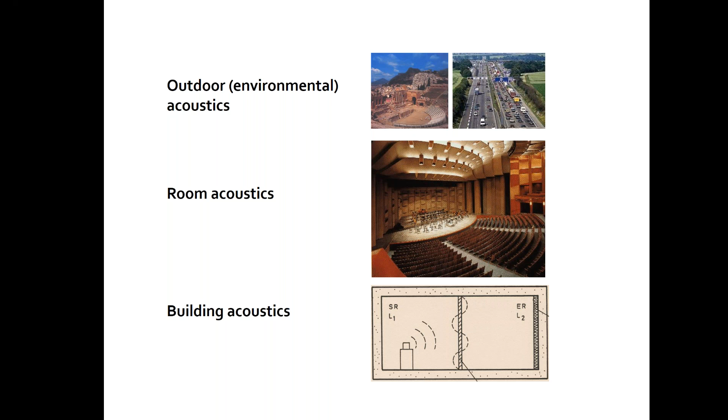Very important, of course, is also the so-called building acoustics that deals with the possibilities of noise propagation within built structures through airborne noise propagation or impact noise propagation, and the problems that occur when inhabitants of one unit of a building are disturbed in their living or working processes by noise originating from other parts of the building or from outside. So conventionally we put those issues under the heading of building acoustics.

So in order to have a basic grounding in discussions of building acoustics, it is important that we take care of a number of issues. One is, what are the main dimensions of the so-called acoustical space? Traditionally, we talk about acoustical space as a virtual multi-dimensional space in which the relevant parameters associated with sound events are captured.

As most of you know, these acoustical events have certain properties, such as the frequency, which is associated with the wavelength of the sound. They have some energetic capacity or intensity that is subjectively associated with the loudness. They evolve in the time dimension, so they have temporal patterns. And they also have complex combinations of multiple waves, in the musical sense, for example, in terms of harmonics, that give something like an acoustical correlate of what we in visual terms refer to as color. So those are the basic thrusts of how we describe an acoustical environment.

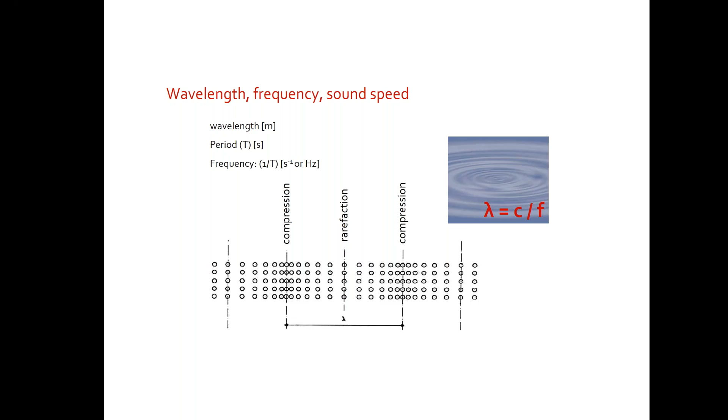The wavelength is very important in acoustical computations because the range of wavelengths, the dimensions that we encounter in room and building acoustics, are very significant in terms of the interactions of the wavefront and objects, be that obstructions in the sound propagation field or building elements that reflect and absorb sound. So that interaction is fairly complex. It is dependent on the wavelength and the frequency, and it also represents some of the challenge that we face in modeling of the environment.

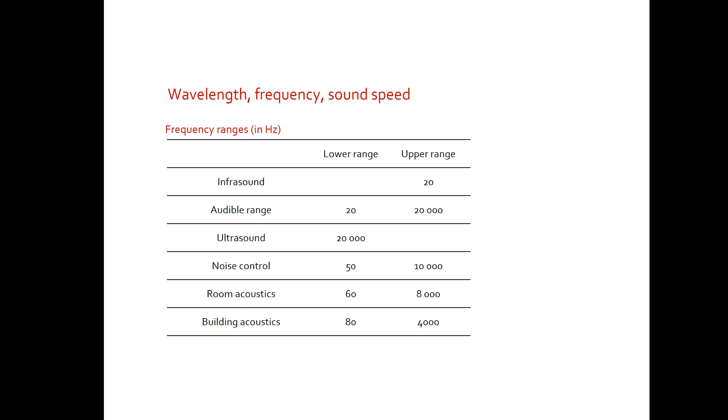As you are aware, as human beings we perceive a certain frequency range, from about 20 to, in the case of young and healthy people, 20,000 hertz. But for most acoustical applications, a subset of this frequency range is of interest. Noise control about 50 to 10,000, in room acoustics about 60 to 8,000, and in building acoustics roughly from 80 to 4,000 hertz is the range of acoustical events in terms of frequency that we take into consideration.

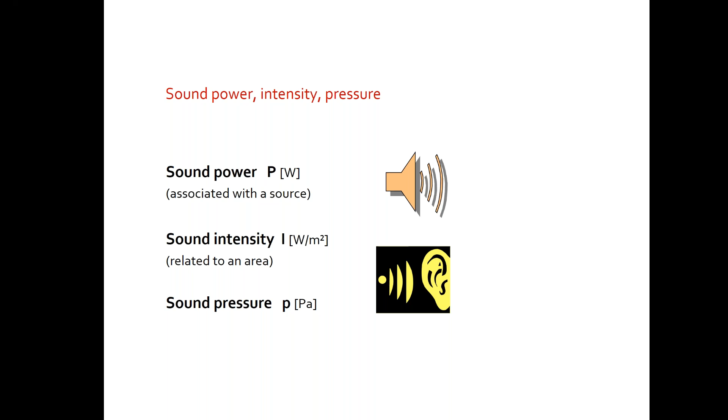The energy associated with sound events is typically captured in terms of sound power, if we talk about the capacity of the source to generate acoustical events. If we look at the energetic impact of a sound at a certain distance from the source, we can use the notion of intensity, which relates the sound power to a specific area. And for typical measurements, usually local fluctuations of the sound pressure, this amplitude, is measured and is referred to as sound pressure.

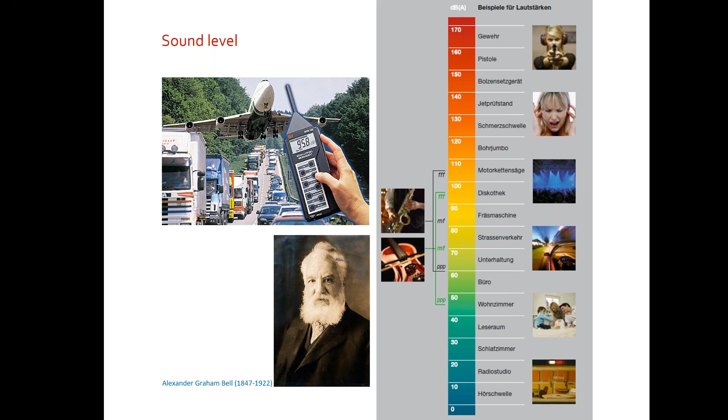And as most of you are aware, in acoustical specifications we typically do not use the classical units of power, intensity and pressure directly. In most cases, we use sound levels. So we represent the sound power, intensity, and pressure on a logarithmic scale. We take the measured values, make a reference to the threshold of hearing of people, derive from that this logarithmic scale, and express the intensity, sound pressure or sound power level in decibel units. These decibel units are easier to deal with in communications, and they provide a good overview of the energetic aspect of the acoustical exposure. The definition of that is fairly standard, and most of you are familiar with it.

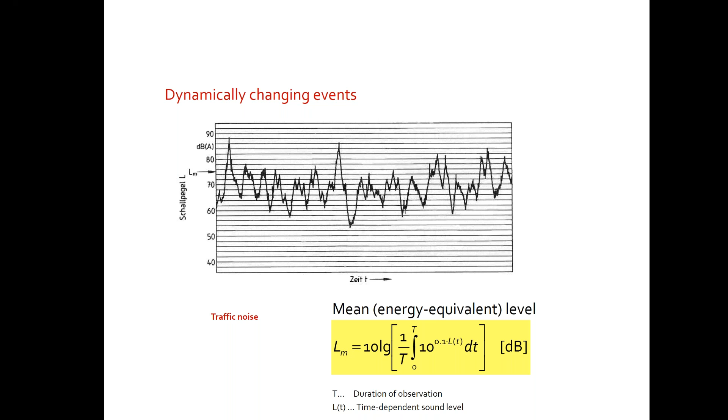Likewise, we can look at fluctuating events in the acoustical realm in terms of energy content over time, expressing the intensity of such events over time in numbers that provide an energetic equivalent of a fluctuating event, such as traffic noise. A very good way to obtain an overview of the basic properties of acoustical exposure is to look at the frequency domain. Basically, a frequency spectrum expresses the intensity of the event as a function of frequency. And you can have dynamic versions of the frequency spectrum and follow the evolvement of an acoustical event over time. It's a very good view to obtain an overview.

As far as our acoustical perception is concerned, it's a very complicated, very interesting, very dynamic feature, and surely we cannot cover it in a very short time. But generally speaking, our perception of the acoustical environment with regard to its physical fundamentals is quite nonlinear. We are more receptive to certain frequencies. That means lower levels of energy are sufficient to create an acoustical perception in the mid-frequency ranges.

For example, the language or most of the musical experiences are considered. Towards low frequency, our ear is, so to speak, less receptive and less sensitive. And this nonlinear property is usually depicted in literature in terms of the equal loudness curves.

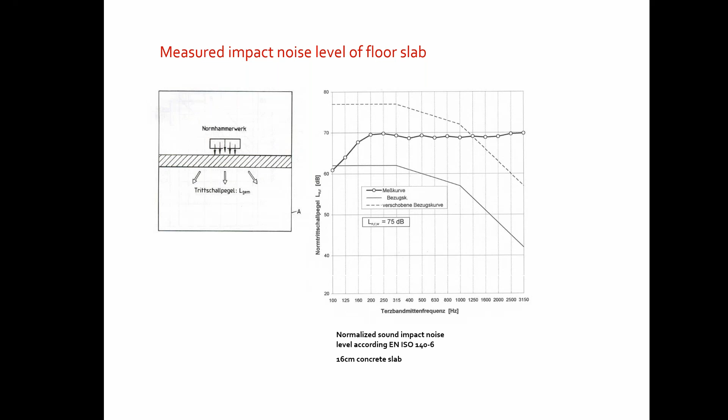With regard to the room acoustics, where we are talking about the acoustical quality of the indoor climate, which is very important for rooms that are meant for acoustical communication, like lecture rooms, classrooms, rooms for cinema, performances of music. For those type of rooms, this acoustical quality is important.

In order to capture the processes that are involved, we need to be aware about the impact of the form, the geometry, because that geometry determines a number of issues with regard to the sound propagation in the room, if it's uniform or not, if there are unwanted concentrations of the sound energy in specific spots in those rooms. But also we need to look at the properties of, for example, surfaces in the room, in view of how much and in which way they reflect, absorb, or transmit sound energy.

Incident sound energy typically can be reflected to a certain amount or absorbed, and that can have a direct effect on the resulting distribution and characteristics of the sound field in a room. So in room acoustics specifically, we look at a definition of the sound absorption coefficient as the fraction of non-reflected sound energy divided by the total incident sound energy on a building component, for example, or on a material.

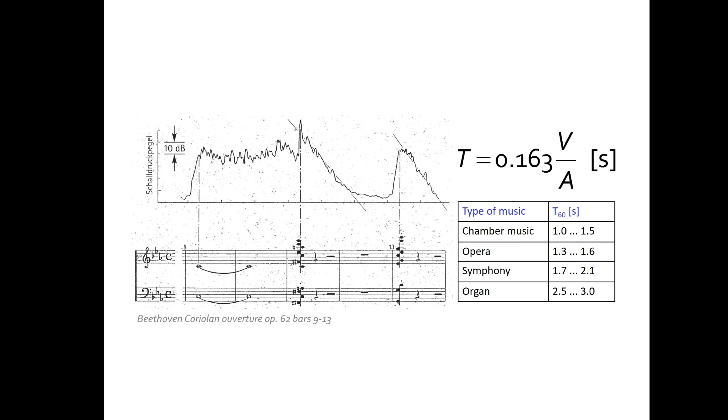But the reverberation time, as I said, is just one amongst the many different and useful performance indicators that have been introduced in room acoustics. In the IBPSA book chapter, there is a table and there are some definitions. I will not go through those definitions in detail, but today we look at multiple indicators to address various features of the expected performance with regard, for example, to clarity, to the intelligibility of the spoken word, and the warmth of, let's say, musical performances, and these different indicators that can be computed, can to a certain degree be predicted, help us define those issues.

Now, let's move to the part where we can maybe discuss some general approaches to how we can generate models of rooms and try to apply formalisms, mathematical formalisms, to analyze and predict the acoustical performance in various areas of environmental acoustics.

In the area of building acoustics, which I talked about before, there are a number of methods available to try, for example, to predict the rate of sound transfer, or the predicted transmission of sound from one portion of a building to another, by taking into account the properties of the involved construction elements, such as walls and floor constructions and so on. Some of those methods or algorithms are captured in standards. Different countries have different standards in that area, and the idea is to identify various transmission paths.

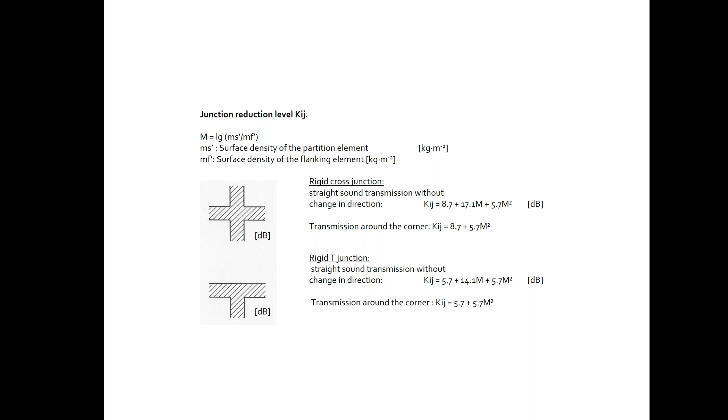Even though in principle there are numeric methods available to address those issues, because of the complexity and especially the frequency domain in building acoustics, they have not emerged yet as, so to speak, full-fledged numeric methods that you can pick up off the shelf. It seems to me right now those methods are usually used by researchers for rather limited models of, for example, a basic assembly rather than whole building simulations. So in that area, practitioners are mostly still using these types of gray box, empirically based models.

When we talk about sound propagation outdoors, and later on about sound propagation indoors, there are computational methods that are numeric and more detailed. We could argue that they evolved significantly and are also being used by practitioners. At a very basic level, you could also argue that the underlying physical phenomena are very similar when we talk about sound propagation in a free field and sound propagation in a room.

Basically, we can consider that the airborne sound emission can be captured in terms of a source emitting sound energy with some directionality pattern. It could obviously be fully uniform in an idealized sense, but it could also be directional. And then simply using the inverse square law, we could predict the decay of the local intensity as a function of the distance from the sound source.

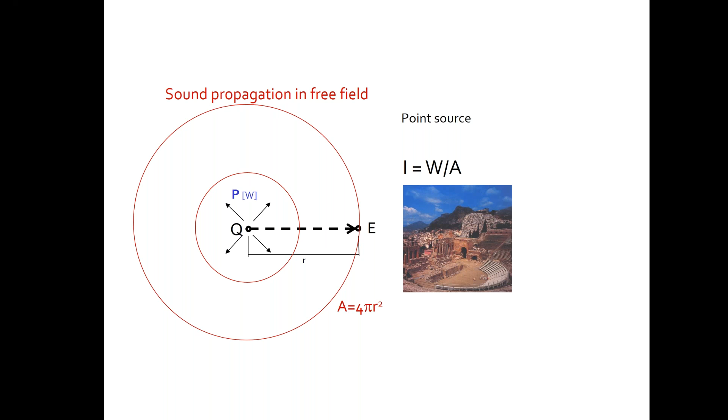There are, of course, some levels of complexity that affect those basic predictions. For example, we know that the temperature-dependent layering stratification of the air has an impact on this propagation. Likewise, we know that the concentration of water vapor in the air, the relative humidity, has an impact on the sound absorption properties of the air as a medium. So those complexities have to be included, especially for outdoor sound propagation, because they can play a major role.

We also obviously have to look not just at isotropic, uniformly sound-emitting sources, but also at different, more complicated or more involved sound sources, because the resulting sound distribution field would obviously be different. We also move into another layer of complexity if we consider that the relevant range of frequencies involved in environmental acoustics is fairly large.

If I simply compare that to light emissions, when you do light simulation, you obviously do have the notion of how to simulate different colors. But the methods that you would use, for example, ray tracing and radiosity, would not be so much affected in terms of the complex geometric interactions. In room acoustics, we have this issue that the interrelationship between the magnitude of the wavelength and the size of the buildings that, for example, act as obstructions or reflectors is fairly complicated.

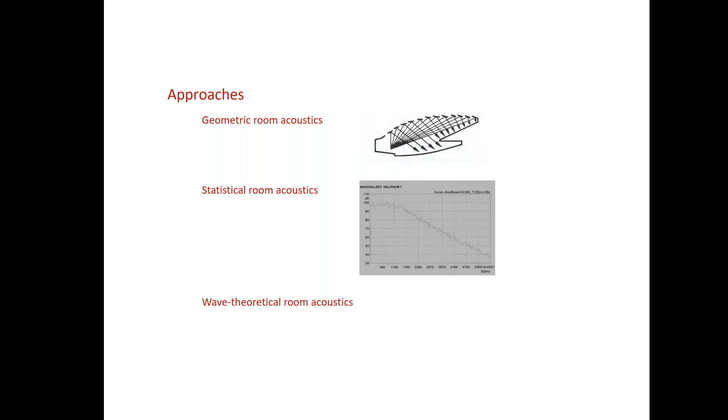the statistical room acoustics. The wave theoretical room acoustic is mathematically most demanding, and it would look at the impact of the wave nature of the sound field and resonance effects, and also the room resonance effects and three-dimensional effects associated with that, which for straightforward boundary conditions can be solved analytically, but involves a fairly complicated mathematical apparatus to address issues in room acoustics.

A relatively good way to obtain a picture of what happens in a room, in more simple terms, in comparison to the free field: you could imagine that in the free field, you are basically using the inverse square law, and you're saying that by increasing the distance from a sound source, the energy density is reduced proportional to the propagation of the wavefront. As the wavefront grows proportional to the square of the distance, the energy density reduces proportionally, something like 6 decibel every time you double the distance, and that would give you the basic tendency of the sound level

in the free field. Now, in a space, you have obviously the response of the room, and statistically speaking, that response of many reflections by many constitutive surfaces of the indoor space would create a diffuse field. And what you then expect at a specific location is the superposition of those. If you have a room which has very little absorption, so most of the surfaces are hard, then you get a diffuse field that is strong. If you have a room that involves a large magnitude of absorbing materials, then you get closer to what's going on outside, so you don't get a lot of response, and the diffuse field is weaker.

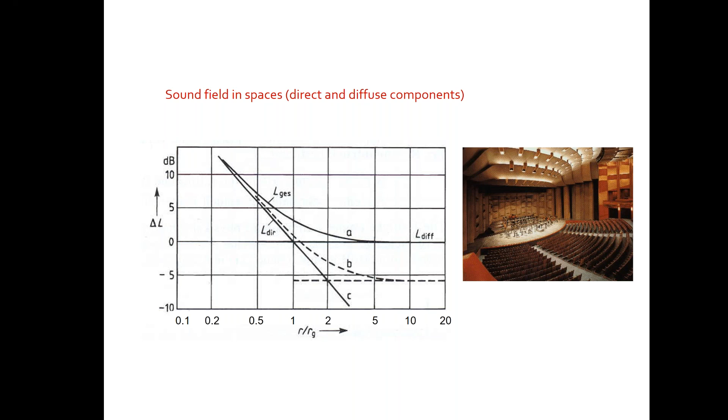So before we started to do computationally supported ray tracing, this notion of splitting these two and predicting them separately for standardized morphologies of rooms was quite common. In geometric room acoustics, as I mentioned before, we can constitute idealizations of sound energy being distributed in a certain direction, and pretty much as we do it in the area of visual simulation, we can then pursue the destiny of these rays.

If you're talking about, for example, specular reflection, we can apply the Snell law and say the angle of incidence and the angle of reflectance are equal. Once that's the case, you can create source images of multiple order, and that provides you with a convenient way to look at the distribution of the sound. So you can have first order image sources, or second order and multiple orders.

And in computational simulation, as long as you can assume that a surface is creating specular reflections, that is a smooth surface, and it is relatively large compared to the wavelength of the incident sound, then you can use the source image method in order to pursue the ray tracing and arrive at some information about what densities you expect at a certain point in time.

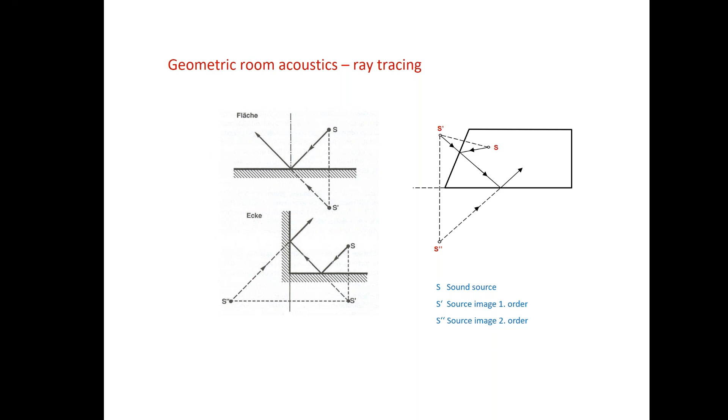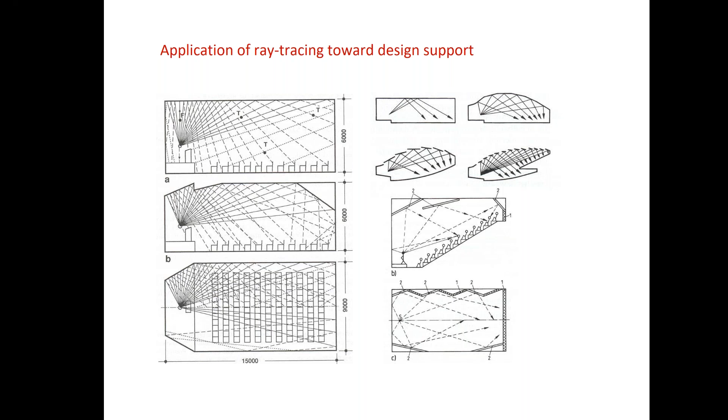It allows you to judge from the formal point of view also what is the impact of the shape of the room, the orientation, the slope of the surfaces, and in fact in design those can be used for special applications, for example large rooms for speech or musical performance, in order to optimize the formal aspects of the room, especially if it involves reflecting surfaces.

You can also take that possibility in the computational realization to judge, for example, if reflections are useful. Obviously, the indoor acoustics benefits from the fact that the enclosure of the room is providing reflections, because it intensifies and complements the direct sound component. That's, so to speak, the advantage of having acoustical events within rooms.

But if those reflections arrive too late at a specific point, then they might be problematic. They can create, in the extreme case, echo, but also, even if not so extreme, they can create a kind of messy, so to speak, and not very well-defined acoustical sensation.

So in order to do that for different applications, we allow for a certain maximum arrival time difference or path difference between the direct and the reflected sound arriving at a receiver, and a computational construction of those patterns of reflection allows us to see if, in fact, in a specific room, for a specific constellation of the source and receiver locations, we have to expect such problematic reflections. And if yes, how can we address that? By maybe adjusting the orientation of the reflecting surfaces, or if applicable, by using sound absorption to address the problem.

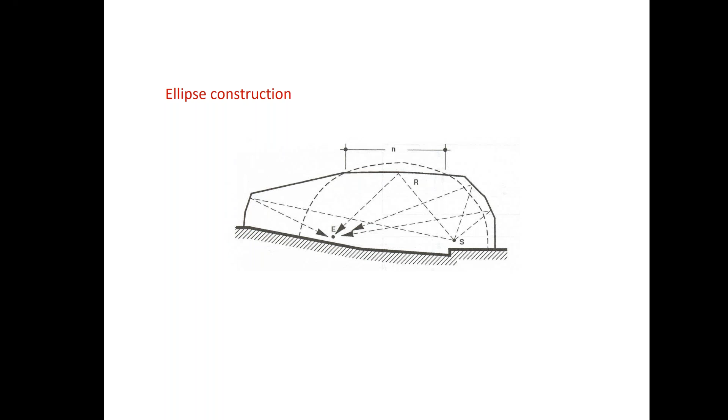Traditionally, we have used this method in order to identify what part of a room enclosure for a given constellation of source and receiver provides useful reflections, and what part of the room might provide reflections that come too late and create effects that we would like to avoid.

As I mentioned before, we need also to address this complexity, which is the interrelationship of the wavelength and the nature of the reflecting surfaces, because the wavelength of sound in room acoustics can be very different. At very low frequency, you have multiple meters, basically wavelengths that are the order of magnitude of the room dimensions. And if you go to high frequency, we're just talking about a few centimeters.

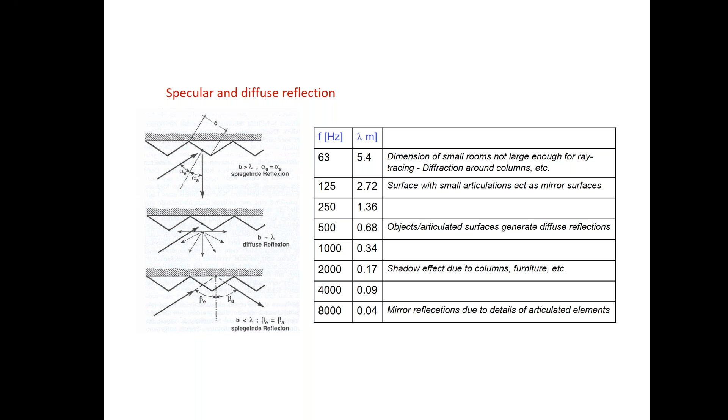So you can have articulations in rooms that are big enough for very short wavelengths to create mirror reflections. But if we get to a point where the dimensions of these articulations are about the same order of magnitude as the wavelength of the incident sound, then we get diffuse reflections. So we need to address those interactions also in the simulations, otherwise we will not be able to simulate the effect of scattering of the sound by rough surfaces, or for example, the presence of objects, columns, and those type of furniture elements in the way that they influence the sound distribution in a room.

To address those, there are different possibilities. Most of you are familiar with the visual performance simulations. You know that ray tracing obviously is used massively in those, but also radiosity, radiosity dealing mostly with, so to speak, the non-specular reflections. There are instances of both of these methods also being used in room acoustics. However, quite popular in most recent developments is that one addresses the specular reflections through the source image method, for a few orders, if you want.

But in order to address the scattering properties of rough surfaces, or where the wavelength and the dimension of the reflectors are problematic, in those cases probabilistic methods are also used. So the idea is that the energy being reflected after the sound bounces from the surface can probabilistically be diverted from what is suggested by specular reflection or Snell's law. And if you then do Monte Carlo type simulations, you could have a pattern that would be statistically representative of the behavior of that surface in dealing with the specific wavelength which is incident on the surface.

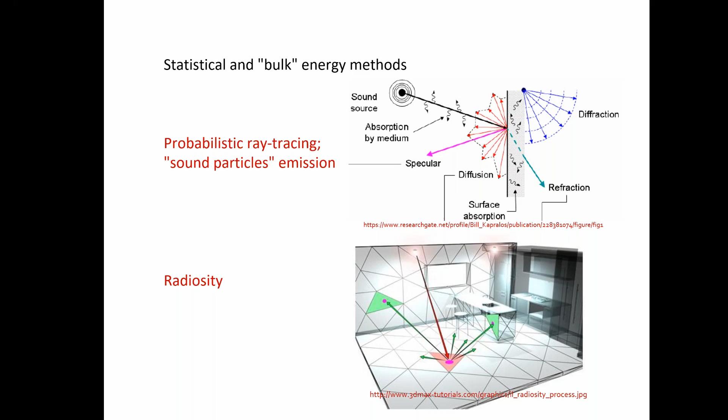So this is the method that most recent developments in acoustical simulations are deploying. I don't want to talk about specific programs. There are multiple programs that are available. Since we have been using one of these programs, I just mention it: the Odeon program.

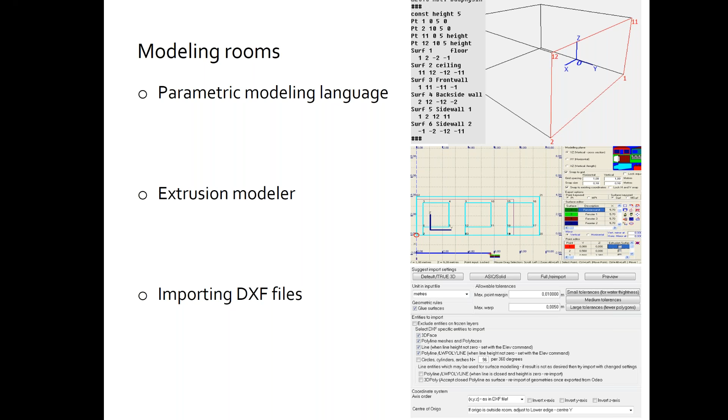The structure of these programs in terms of the input and output typically goes through a certain number of steps that I just quickly mentioned. You will start by defining the geometry of the room, either by some parametric modeling language, or you have some aiding tools that help you extrude a geometry, or you basically import from CAD files, BIM, DXF files, and adjust them in order to have a geometric representation.

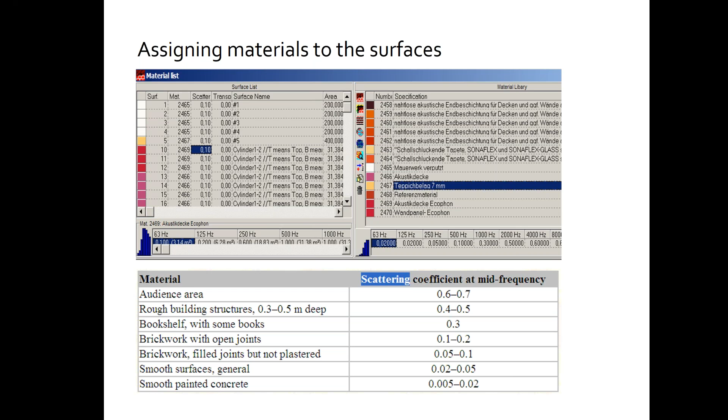Obviously, it's very important to assign materials to the surfaces that you imported in your model. That information involves the acoustical absorption coefficient, also the scattering coefficient. Most programs come with a basic database of some default materials that you can use in a specific planning task. You obviously need more applicable information from the manufacturer in case you're looking at specific products.

You need to obviously insert sound sources. These sound sources, again, can be provided by these applications in a default sense: human voice or a specific musical instrument. You can also generate sound sources by defining the three-dimensional sound distribution pattern and also the overall sound power, and that way define your own sources.

Then you set certain calculation parameters. This is the part where some experience, both in the foundation of room acoustics, but also with the applications that you happen to be using, is necessary: transition orders, how many early reflections are you considering through the source image method, and when you go beyond that, what do you do in terms of the number of rays and things like that.

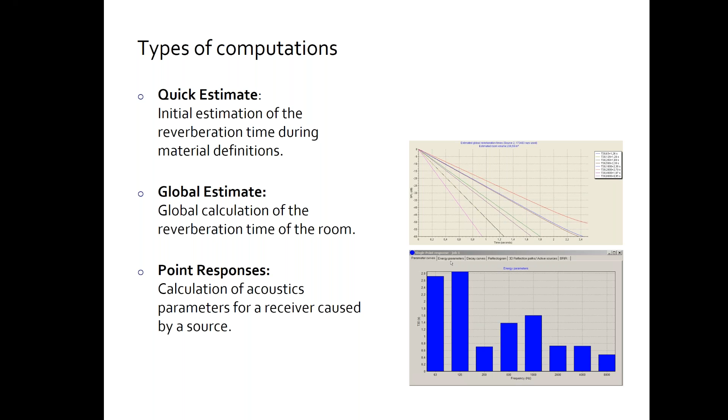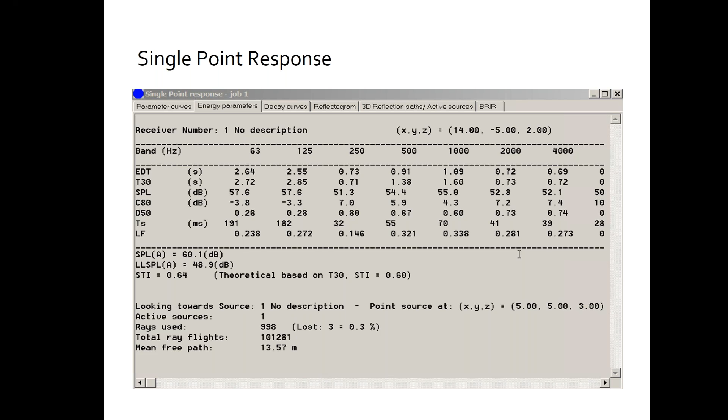These programs provide you the possibility to do a very quick estimate, for example, using the Sabine method. You can make some global estimates for the room as a whole, so get room-related mean values of indicators such as the reverberation time. But also, for the specific receiver points that you have defined individually or on a grid, you can calculate in detail the value of multiple performance indicators, such as the early decay time, the reverberation time, sound pressure levels, measures of clarity, and the speech transmission index, and so on. So they give you these values.

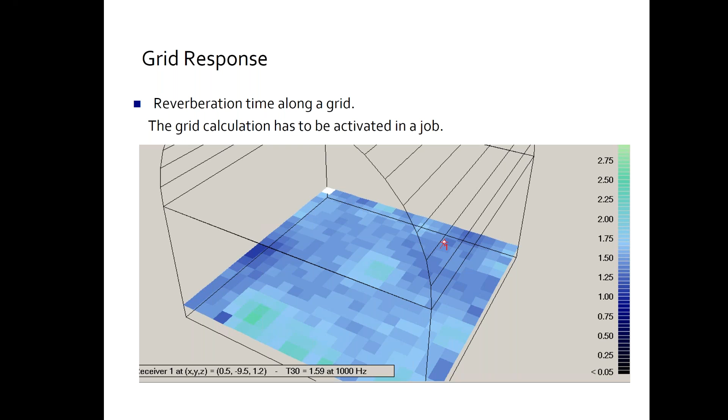What is also very useful is to get a time domain representation of the arrival of the sound energy in terms of the first arrivals and distinct arrivals from different parts of the room. That helps you identify potentially harmful reflections or geometric constellations that might give you late reflections at high intensity, so they may be perceived and could be harmful to the overall acoustical experience. As mentioned before, you can define a grid and, analogous to visual performance simulation, get distributions of these indicators on a plane or in a three-dimensional sense.

One very attractive feature of the advanced room acoustic simulation models is that these reflectograms, which show how the space transforms the signal emitted by the sound source, this computational transformation matrix, can be auralized. The idea is that you can apply the same manipulation to any signal that you introduce into this model and use electroacoustic methods to make it audible. A typical approach is to use a headphone and listen to how the space has changed the initial properties in terms of the frequency and strength of the acoustical impulse produced by the source.

So that comes very close to a visual rendering as we do in visual simulation. Long before the room is constructed, you get a first feeling of the type of acoustical experience that you could be expecting. Of course, you could argue that headphones don't quite capture the directionality of the sound. This is a general well-known problem.

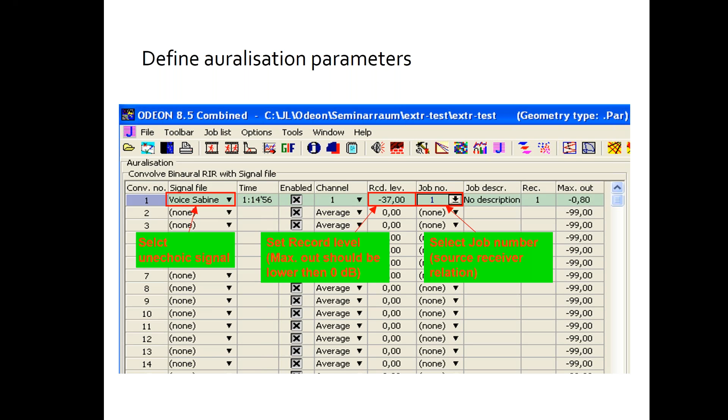So there are even specific laboratories that recreate this directional effect, not by using headphones, but by using a series of speakers to emulate the behavior of a virtual room, a kind of virtual reality in an acoustical sense. So that is a very attractive feature of the advanced room acoustic simulation model. You can define such auralization parameters and create files that you can listen to for different positions in the space.

Okay, this was rather dense and somewhat brief. I understand that I talked about multiple issues only in terms of very short, brief overviews, but I hope I could give you a feeling, in case you have not been in this field, of what are the main issues and what are the main possibilities. It appears to me that especially in the area of room acoustics, maybe not so much building acoustics yet, but room acoustics, we have come a long way.

Up till a few decades ago, I would say, design of successful room acoustics was a kind of hit-and-miss endeavor. People would study historical spaces. I have here, for example, the Musikverein Saal in Vienna, in my hometown, which has great acoustics. So people would study these buildings and try to find what is the secret of this acoustics. And in many cases, people would do new buildings and the acoustics didn't satisfy or didn't meet the expectations.

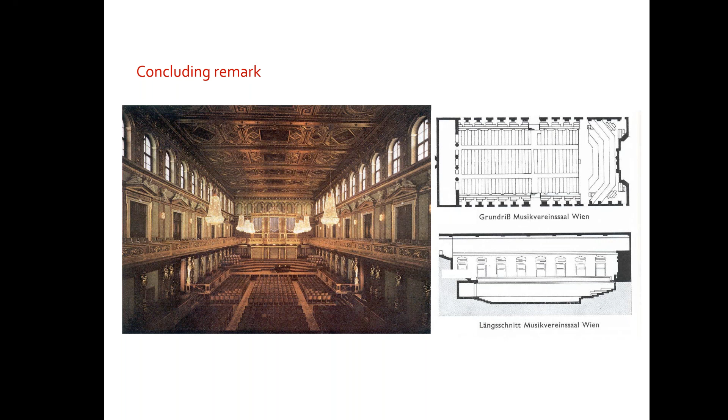But it seems to me that in the last decades, due in part to advances in building physics and acoustics, but also the modeling techniques, it has become more of a dependable process in which, for sure, we can avoid basic issues. You could argue that maybe getting that ultimate quality is still something that cannot be 100% designed, but for sure we can design spaces that avoid pitfalls, that avoid basic problematic issues, and provide a fairly reasonable or excellent room acoustics.

Maybe one last concluding remark, which I should mention to complete this picture, is the uncertainty associated with acoustical simulation. As with all the other areas of building performance simulation, there's always the question of how good we are in terms of predicting the real performance. That means if we design a building and later on we go and measure the performance, and in the case of acoustics, it's actually quite convenient. It's much easier in a sense than the thermal

simulation predictions, because in order to figure out if your energy or temperature predictions are okay in a building, you need to look at longer periods of time and look at the interaction with climate and things like that. In room acoustics, it's fairly straightforward. You go into a room, put your sound sources in there, and you measure these indicators. So testing the validity and reliability of these models is not that difficult, but the question is, what are the sources of uncertainty and what can go wrong in modeling?

And there are a number of issues, obviously, like in many other areas, if the integrity of the model is not satisfactory, if the geometry is not properly modeled. So that can be part of a problem. Another challenge is the correct specification of the acoustical properties of building components, which is also not trivial, especially if at a certain design stage you don't have the final information about what materials would be used and where they would be. So that introduces some uncertainty.